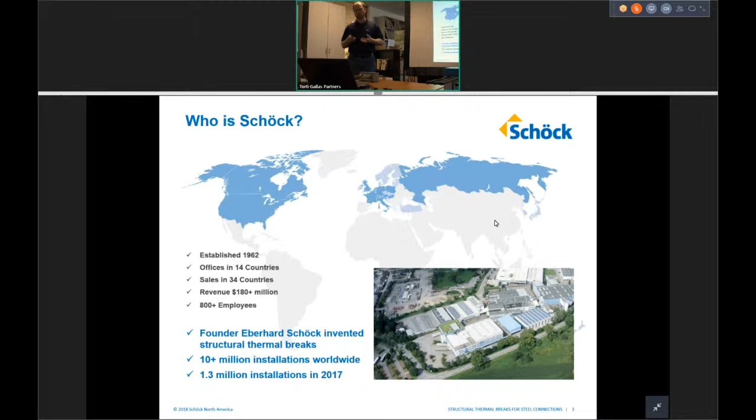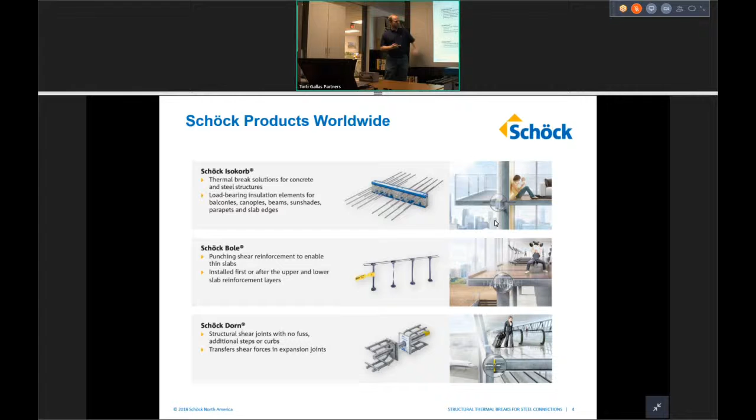Today we're known for being specialists in structural thermal breaks, which is what we want to talk about. Besides structural thermal breaks, we also make double-headed punching shear reinforcement for very thin flat plate slabs, especially shear dowel reinforcement where we have to transfer loads across expansion joints. We're just starting to roll out a thermal bridge-free facade connector for ventilated rainscreen facades, and we do a little bit of noise dampening solutions for stairways as well. So that's the other stuff we do, but the bulk of what we do, what we're known for, what everyone calls us up for, is the structural thermal breaks.

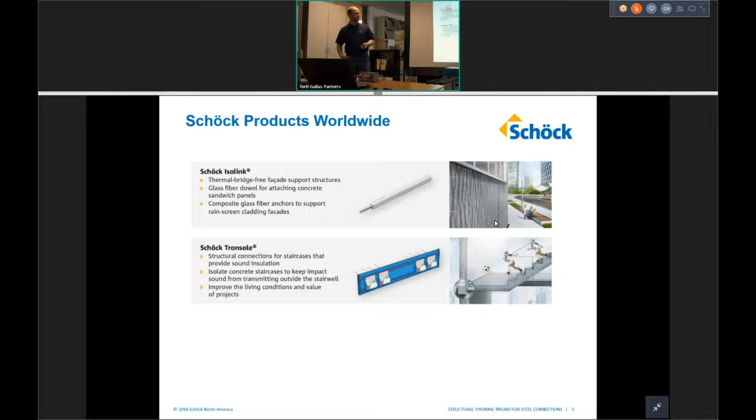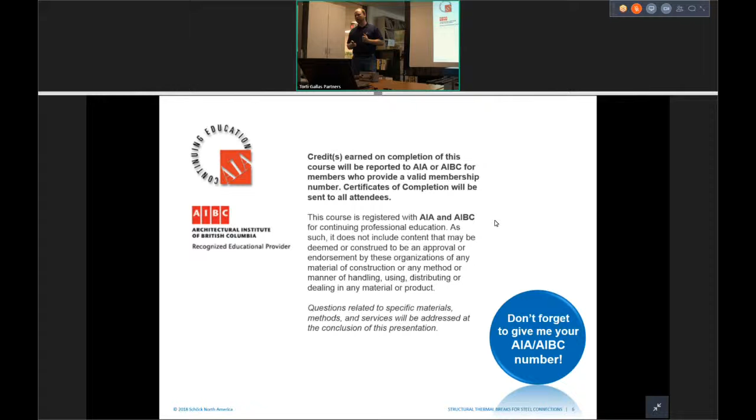Today's presentation, what we want to do is start out by looking at why thermal bridging and thermal breaks are more important than ever in steel structures, and how the building codes are changing and what that's going to mean for us into the future. Because of those changes in the building code, we want to look a little bit deeper into the building science of how to thermally model these thermal bridges and what difference the thermal break can make there. We need to talk a bit about condensation control, because if we're going to install a thermal break, that's often what it's used for, in addition to not wasting energy. Then at the end of the presentation, we'd like to go through a few of the solutions available on the market and look at some of the pluses and minuses and where their strengths are and maybe their sweet spots for those different solutions.

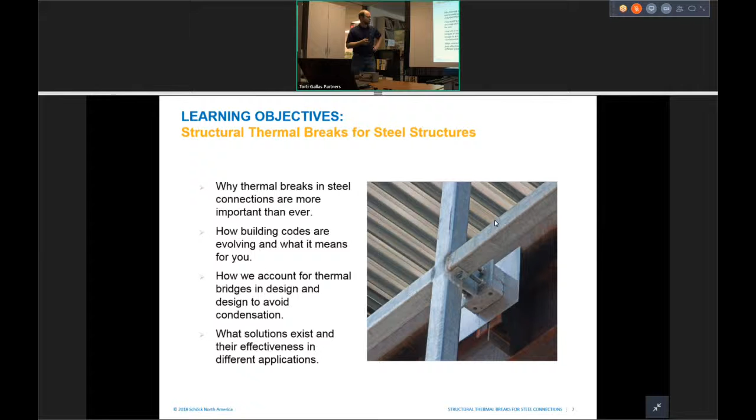Just to start out, a recap of maybe what we talked about 2 years ago. So what is a thermal bridge? We build a building, and in almost every case, we have to pass some sort of structural element through the building envelope. Whether that's a canopy beam at an entrance, maybe some rooftop dunnage posts, something like that. Somewhere on our building envelope, we're going to have structural elements coming across that insulation layer. And where those structural elements come through the insulation layer, because of the high thermal conductivity of that structural material, we're going to end up transferring a lot more heat at that location.

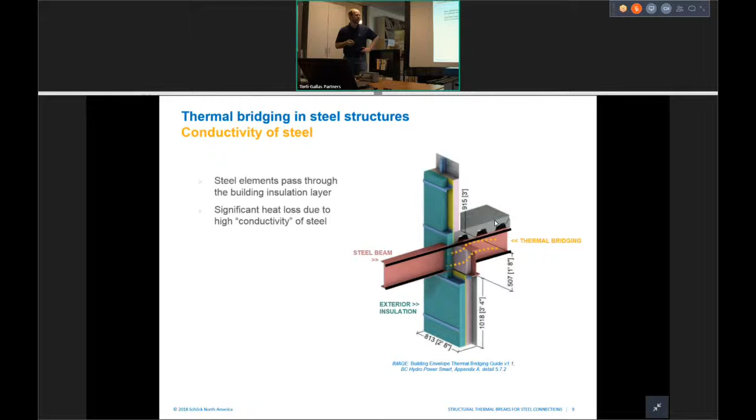So that increased heat flow is called a thermal bridge. If we compare the thermal conductivities of different materials back to mineral wool, since that's a nice standard insulation material, thermal conductivity for mineral wool is 0.03.

And so this is why, as architects and engineers, we need to start paying more attention to these types of connections, particularly as our energy codes are getting tighter and trying to tighten up things around energy use.

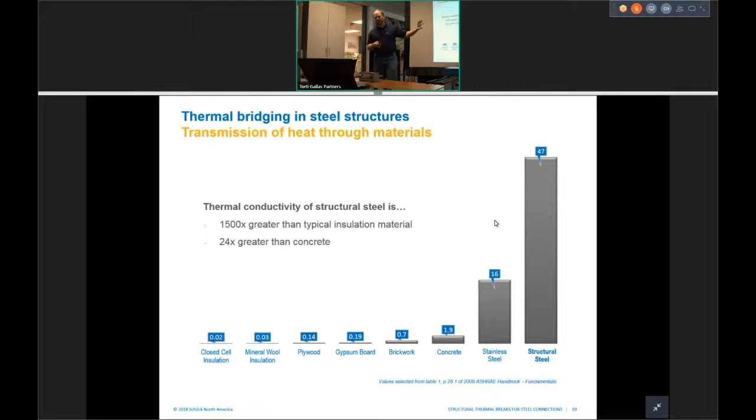Now, before we go forward, one thing I want to point out is that if we go from structural steel to stainless steel, it's quite a large drop, even though stainless steel is still pretty bad. There's a significant improvement once you make that switch in material. Remember that, because it's going to come up again at the end of the presentation when we talk about solutions.

So what are the big issues typically associated with thermal bridging? There's the obvious one of energy loss - we're wasting energy through the location where that structural element comes through the building envelope.

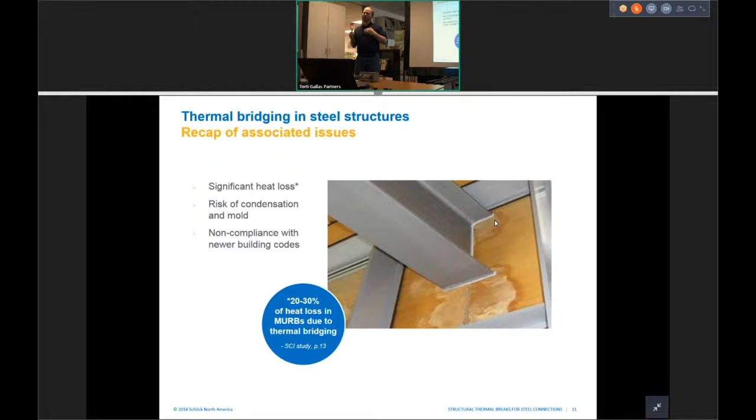Another issue is the risk of condensation or mold growth, particularly for steel connections - that's often a bigger issue than the energy loss. There can also be thermal comfort issues. And as energy codes are changing, if we're going to stay in compliance, we need to be paying attention to this issue.

But where do these types of problems occur in our buildings? There's the obvious one of a balcony - anywhere we have a balcony attached to our building. We're showing a steel balcony in this case, but it could be a concrete balcony or concrete slab.

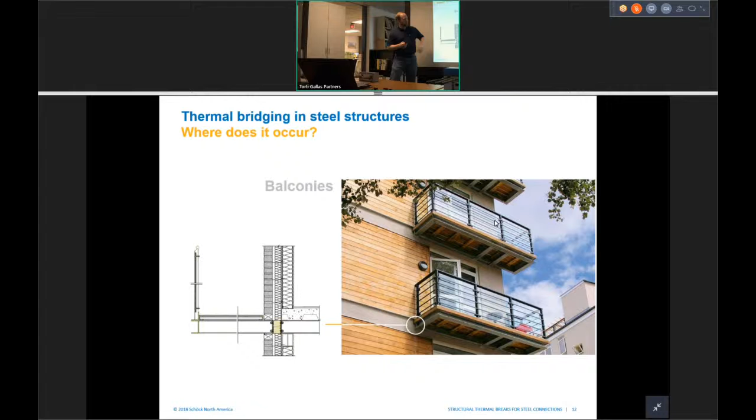Anywhere that steel beam comes through the building envelope and attaches - any sort of canopy, sunshade, or eyebrow connection on our building - all the connections for those elements are going to be thermal bridges if they're not treated.

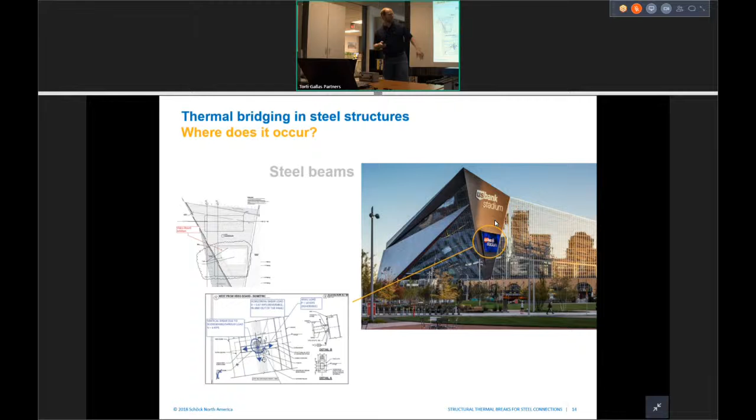Any sort of beam penetration through the building envelope. In this example, the beams pick up the load of the video board on the Viking Stadium.

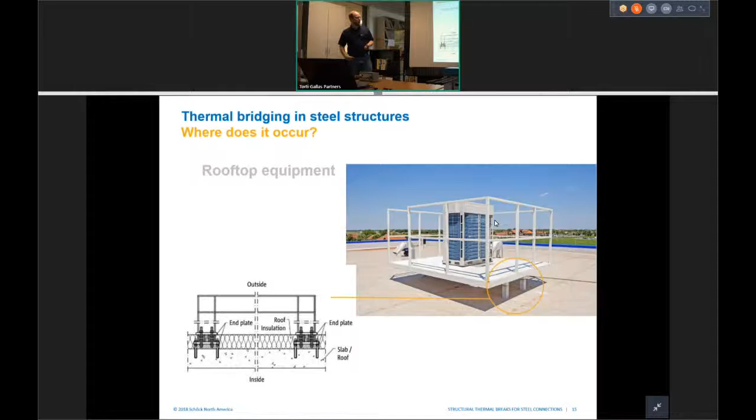Rooftop dunnage or rooftop equipment - those posts that come down through our roof insulation layer, a different variation on that theme. Screen walls are basically the same as rooftop dunnage posts, they just have much higher loads due to the wind load on the wall.

And then masonry support angles - these are often a big one because the toe of the angle usually crosses the continuous insulation. Because it's steel with high thermal conductivity, and there's a lot of linear footage of it all the way around the building, it can have a quite significant impact on the overall energy performance of the building.

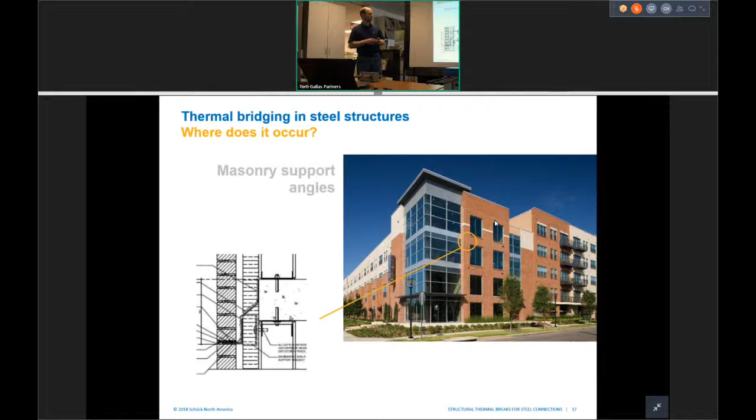Okay, so since 1980, our residential buildings or single-family homes have seen their energy use decline by something like 25% or more. Commercial buildings, it's about 50%. Most of those changes in energy use over time have largely been driven by changes in the energy code.

The energy code gets tighter, we respond to that, we design a tighter building in terms of energy use, and that just steps down over time. But what's interesting is during that same time period, our washing machines and refrigerators have declined in their energy use by as much as 70% or more.

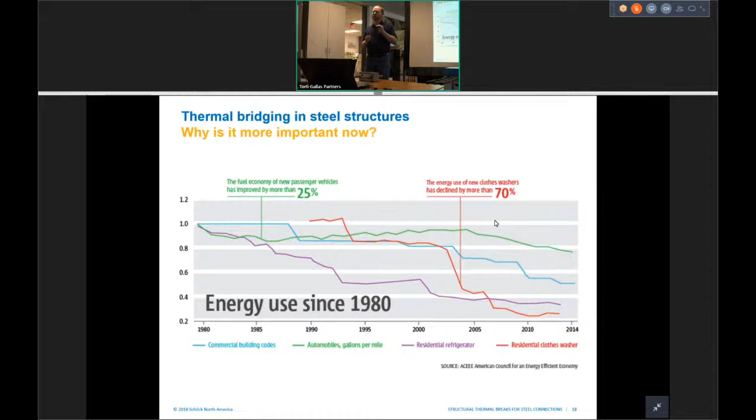So the question becomes, why can't we get the same level of performance in our buildings? If we pay attention to the right types of details, thermal bridges being one of those, then we can start to get that level of performance. Newer building standards, things like Passive House, are looking at that, trying to drive that number down to a very, very low energy use, or even down to net zero on our buildings.

But sometimes when we bring up this issue, we get asked the question: you're talking about energy performance, you're talking about condensation. I've never really had problems with these types of connections on my buildings before. Why is it a problem now? And that may be true.

But as the energy code gets tighter, and we're trying to design a more energy efficient building, one of the best ways to improve the energy performance of your building is to improve the air barrier and prevent that air loss through the building envelope. But as we improve that air barrier and tighten up the building, the relative humidity levels on the inside are going to rise.

Often that's a good thing, because in the middle of winter we usually end up with humidity levels that are actually outside that healthy range. That shows up as things like static electricity, or maybe nosebleeds. Those are associated with relative humidity levels that are too low.

But as we tighten up the air barrier and push that relative humidity level a little bit higher, connections where previously we didn't have these types of issues may start to have problems. So I really have to bring the whole building performance forward together, not just the energy side of it.

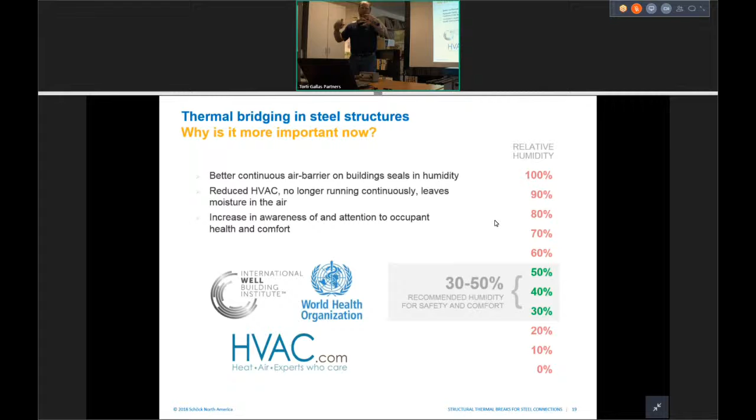Okay, but where are the building codes at with respect to this issue, and where are they headed? Right now, all of the more recent versions of ASHRAE 90.1 and IECC have a definition for continuous insulation that says the only thing that can cross that continuous insulation layer is a fastener.

Now, things like steel beams and concrete slabs are structural elements, they're not fasteners. So the energy code would really like us to look at this situation and deal with it in some way. Within the energy code, we've got several different paths to compliance.

We've got the prescriptive path, the building envelope performance method or trade-off method, and the whole building energy modeling method. With the prescriptive path, it's almost forced into using something like a thermal break to meet some of those prescriptive requirements in the energy code.

But many of the architects I've talked to don't use that method all that often. For the buildings we're designing today, we have to go to one of those other two methods to get them into compliance with the energy code.

With the building envelope performance method and the whole building energy modeling method, the energy code basically says you can sort of ignore the problem at its source, either add a little more insulation somewhere else on the building envelope, or maybe improve your mechanical system, and then say on balance your building is performing equal to or better than a benchmark building.

Now, it's great that the energy code gives us that much flexibility because we need that at times to design some of the buildings we're making today. But at the same time, it doesn't solve the problem at its source.

That problem still exists. We're still wasting lots of energy at those thermal bridges. We still may have the condensation issues associated with it, and thermal comfort issues if it's something like a balcony slab. And so that's sort of the downfall of that approach.

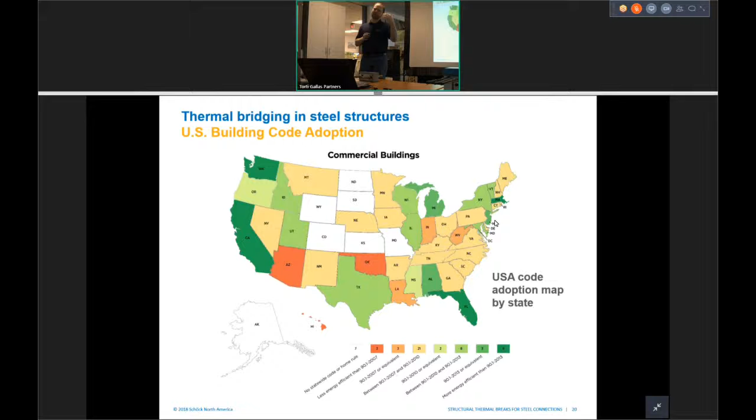They're still working their way through those comments, but my understanding is it's going to go out for one more cycle of review and comments, and they would like for it to get into the next version of that energy specification. It begins to tighten up the language quite a bit surrounding thermal bridging.

One of the things it's doing is starting to get into a little bit of thermal modeling that's a bit different than what we're used to seeing. Right now, we're used to just doing COMcheck, REScheck, things like that to get to compliance.

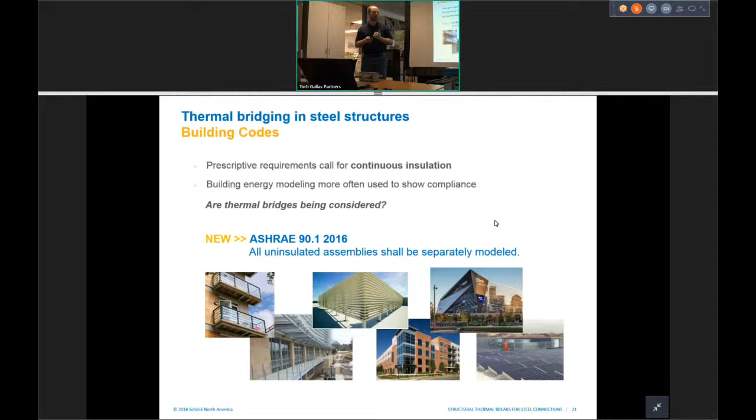But there's going to be a deeper level of calculation or other parameters we have to look at as we begin coming into compliance with the new language in the energy code. So what I want to do now is talk about that building science and what that might look like going into the future.

So we're going to thermally model this type of detail. First, we want to define three terms so we understand what we're talking about. The first term is clear field transmittance, which is basically the overall U value for the building envelope when there's no penetration. The second parameter is linear transmittance.

A linear transmittance is something like a balcony slab, a long linear element, or maybe a masonry support angle, and that linear thermal bridge is measured with the Greek letter psi. A point transmittance, something like a canopy beam, is measured with the Greek letter chi.

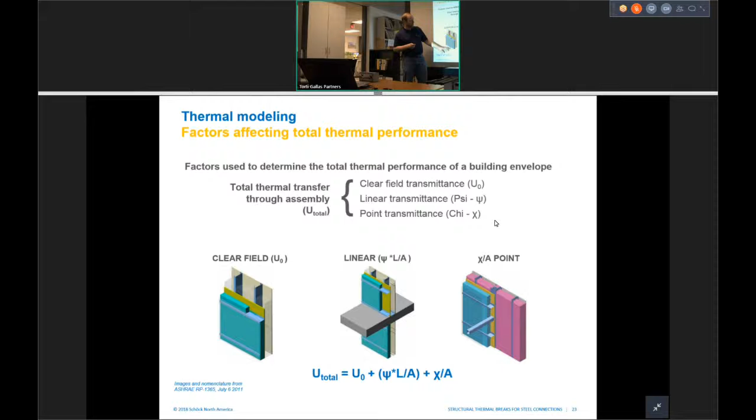If we want to capture their effect on the overall performance of the building envelope, we need to add their effect into the clear field transmittance to get the overall performance of the building envelope at that detail.

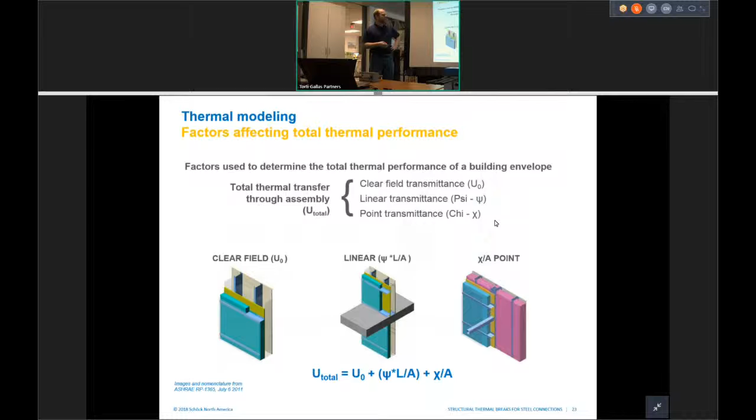If you really want to calculate those Greek letter parameters, you have to create two thermal models: one of the clear field condition with no thermal bridge, and one that has the thermal bridge in it. The difference between those two models gives you that parameter. But I don't know many of us who want to do that on a regular basis, particularly early in design when we're trying to make big decisions and things are changing quite a bit.

ASHRAE realizes that as well, and they're trying to work that into the language as they go. But one of the things they've done to help us is develop a research report that's basically a catalog of details—a lot of these things are pre-calculated.

That research report was later expanded by the same company into the BC Hydro Building Envelope Thermal Bridging Guide. That guide is constantly being updated, and the catalog keeps getting bigger. It's a good reference, particularly early on when you're looking at big decisions, to say, my detail looks something like this, I'm going to use that number for now before we refine the design.

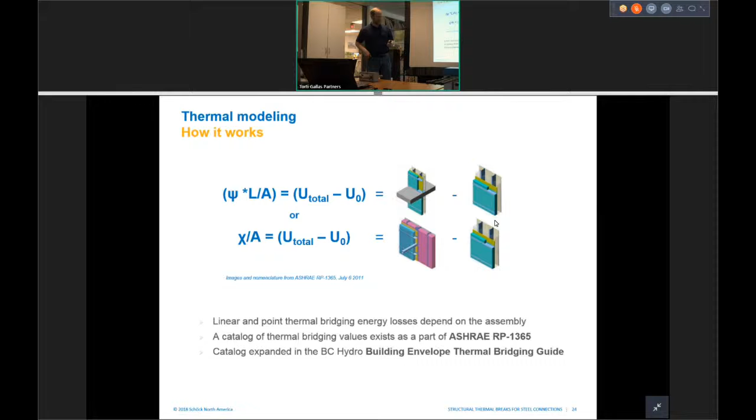But let's go through that thermal modeling process and see how it works step by step. This is a detail from that thermal bridging guide—it's a steel building, a fan deck with concrete slab, steel stud walls, batt insulation between the studs, and some continuous insulation on the outside of that wall.

And then we have a beam penetration through the building envelope. If we first ignore the beam penetration and just calculate the overall clear field transmittance, the clear field transmittance for that wall ends up with a U value of about 0.054, which corresponds to an R value of about 18 to 19—a reasonable wall.

But if we include the effect of the linear transmittance and the point transmittance from the beam into the overall performance of that detail, we get the U total value. What we find is that U value increases by about 3 times, meaning our R value drops from about 18-19 down to about 7—quite a large impact at that slice of the building envelope where that detail occurs.

If we look at where most of that's coming from, it's that steel beam. Now, just to note, they also say there's a linear transmittance here—it's very small. They say there's a linear transmittance at the slab, even though that slab doesn't come all the way through the building envelope, because the batt insulation between the studs stops just where that slab is.

It doesn't pass by that slab—it stops right there. So you can see in the thermal model they get a slight amount of increased heat flow there, but not enough to make a huge difference. So it's basically all just coming from the steel beam.

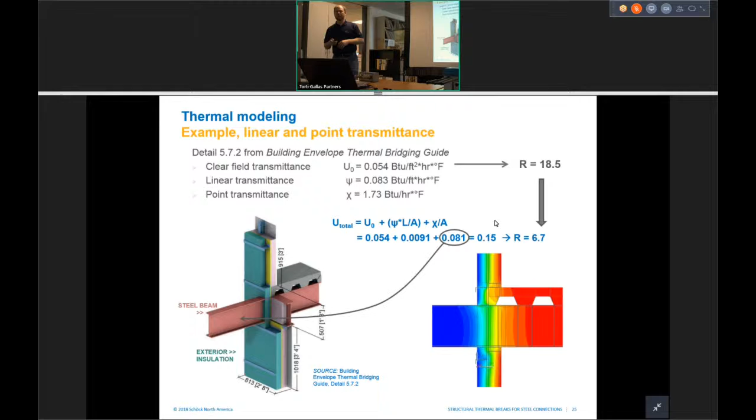But that's how that process would work if you were to go through that step by step in very minute detail. Language in the specs gives you options to make it much simpler and just tabulate it, or if you really want to go to that level of detail, you can go ahead with that.

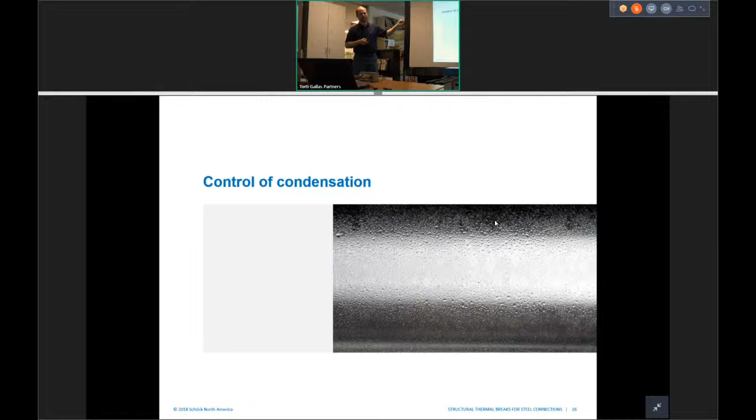But if we're going to talk about solutions to solving these problems, then the other thing we need to talk about is condensation and condensation control. This is not something ASHRAE gets into so much because they are an energy specification. We've talked to them about it, and our scope is basically looking at the overall energy performance of the building, not the rest of this stuff, but it's still an issue. So what we want to do now is talk a bit about the science of both measuring that condensation risk and what we might do to mitigate that risk.

So if we want to look at the science behind it, we're going to use that same detail we looked at before to study this. But what we want to do first is define what's called a temperature index. A temperature index is basically just a ratio between our interior surface temperature of our building relative to the inside and outside air temperature. Now, this ratio can vary anywhere from 0 to 1.

If it's at 0, that means you don't have a building envelope - your interior structure is as cold as the outside air. If it's at 1, that means you have the perfect connection at the building envelope - you're not getting any more heat flow than you would through your insulation layer. That's never going to happen when we have structural penetration; you're always going to get some sort of increased heat flow. But the idea is to minimize that and get this temperature index up to as high of a level as we can, to have little to no risk of condensation.

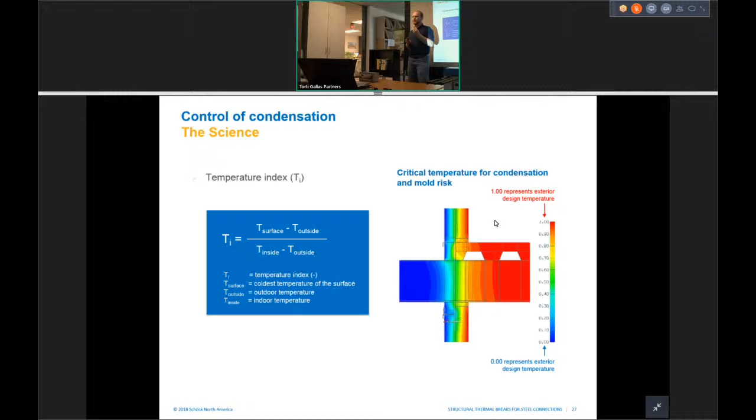So that's the way we can measure our detail. But now we need to compare that against something to understand what type of risk we're going to have of condensation. To do that, to determine what's called a critical temperature index - basically that temperature index where we're going to have condensation - you've got to go to ASHRAE psychrometric charts, or as I like to call them, psychometric charts, because they look so crazy.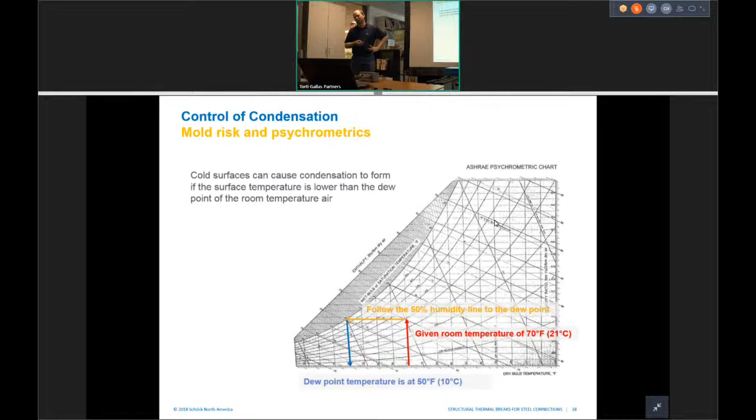This chart is basically just a relationship between interior air temperature, relative humidity, and dew point temperature. If we want to use it, which I don't think most of us want to, you start on the x-axis with your interior air temperature, go up to what you think the relative humidity is, follow that across to the saturation point, and then back down, and that gives you the dew point temperature. You can use that information to calculate a critical temperature index, or a temperature index at which condensation will form. But most of us, if you're like me, don't want to use that on a regular basis.

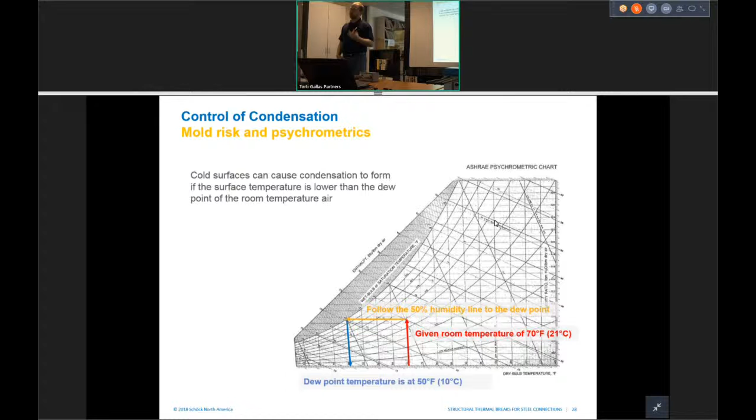So one way to simplify it down is just ask your mechanical engineer, or do the exercise yourself one time. Say, look, I know roughly what my temperature ranges are going to be and my relative humidities. I'm going to create a simple table that tells me all of that information, and I just have that tabulated somewhere. So that's one way to simplify it.

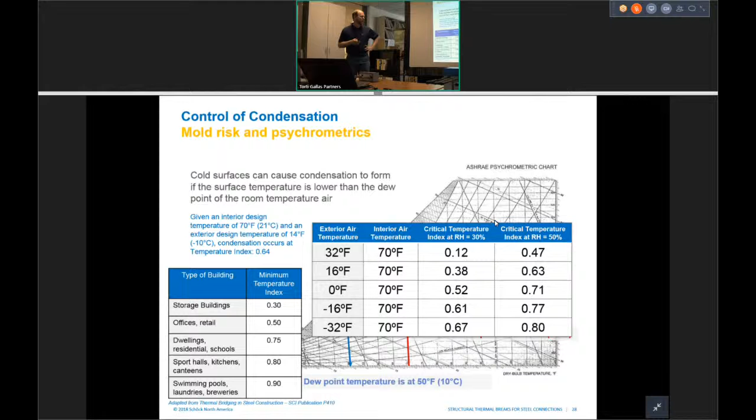Another way you could simplify it - this is what our building codes don't address so much, but in Europe they get a little more into this. In the UK, they say, well, we're going to get rid of all of this, not make you calculate that. We're just going to do it based on building type, because we know roughly what our relative humidity should be, and because they're a fairly small climate zone, they can do this type of thing. But we're going to use this as sort of a proxy, because it's good rule of thumb numbers to keep in our head where we need to be.

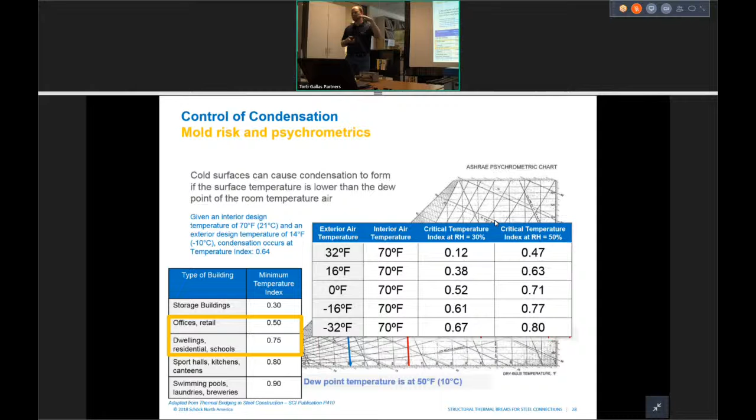So what they do in their specifications is say for office buildings, keep your temperature index above 0.5 if you don't want to have a risk of condensation. For residential buildings, keep it above 0.75. For residential buildings, the relative humidity level is usually higher, so that's why we want to keep that temperature index higher.

Okay, now if we go back and look at the same detail we've been looking at and say, well, how is it impacted?

Both if we don't do anything, and then if we try some solutions to try to fix it. So if we don't do anything, our conventional case, uninterrupted steel beam, it goes right through our building envelope. For this particular detail, that will have a temperature index of about 0.52. So it's marginal for an office building. You might have a risk of condensation, you might not. You're kind of at that boundary where you might have a problem, you might not.

One of the solutions to try to fix this, and we're going to talk about it more, is to use the thermal pad, which is an okay solution if you do it the right way. But often what we've seen in drawings that have come across our desks with these types of solutions is that they're specified at very thin pad thicknesses. But what happens is if you use a very thin pad, you actually get negative performance here. Your temperature index drops. It's not until you get out to about 1 inch thick with stainless steel bolts that we basically get back to the same level of performance that we had previously with just that continuous steel beam. If you want a nice improvement, you need to be 1.5 to 3 inches thick. And we're going to talk about that a bit more, why that's the case, why you get this negative performance, and why you need to have a thick insulation layer.

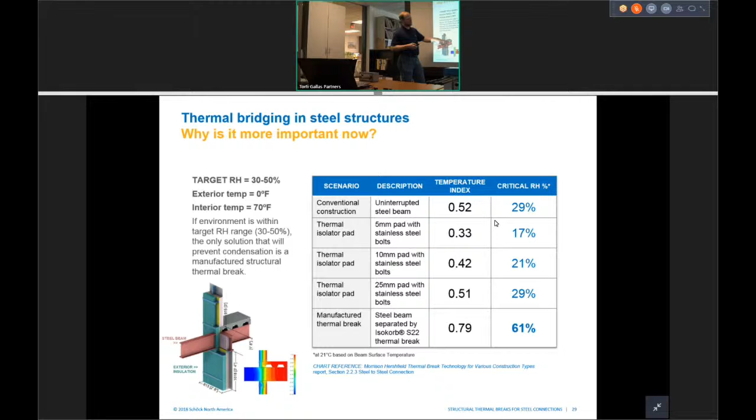The Schöck solution, the one we'll pass around in a minute, it's kind of a manufacturer modular solution, tries to wrap all this, what we've learned, up into one solution. And we can get temperature indexes up to about 0.79, which is basically in the gymnasium range without having condensation issues.

So we've talked about kind of where the building codes are headed, the thermal modeling side, and some of the condensation issues. What we want to do now is look at solutions that are available on the market, some of their strengths and weaknesses, and kind of where the sweet spots for them might lie.

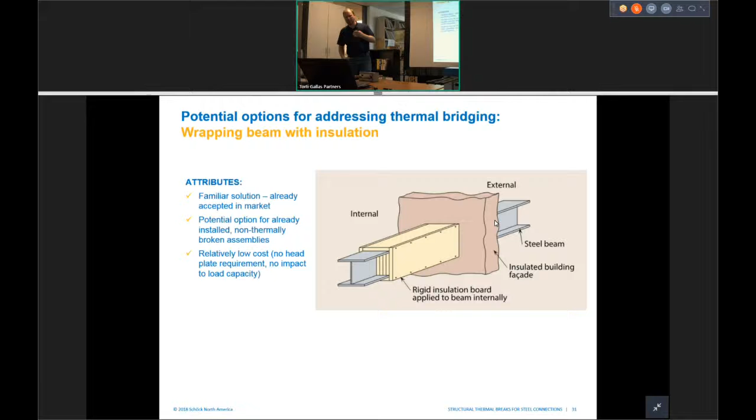And so the first solution we want to look at is probably the oldest one in the book. And that's just to wrap the beam in insulation for a few feet, either inside, outside of the building, or both. Advantages of this type of solution: it's fairly cheap, easy to install, pretty straightforward, but not really any additional materials that we haven't used before. But the challenge is, first of all, it's not a true thermal break. We're still going to get a lot of energy transfer across that connection.

When you use this type of solution, what you're really trying to do is you're trying to solve a condensation problem. And to give you an example of how that works, this detail, if you didn't put any insulation on it, its temperature index is going to be about 0.51. You wrap it for a few feet in insulation, you can move that temperature index from 0.51 to about 0.55. So it's a marginal improvement.

But if you've got an existing building where you know you have a problem, you know you've got condensation issues, and you've done your calculations, and you say, well, I'm just right at that boundary, the relative humidity level is a little bit too high, that's what's causing my condensation issues. If I move that temperature index just enough, I'm not going to have that problem anymore. Then wrapping that beam in insulation might be a great way to solve that problem. It's already in the field, you know you've got a problem. And so that's sort of the sweet spot for this type of solution—existing buildings where we know we have issues, and we know we're at that boundary, we just need to move just a little bit.

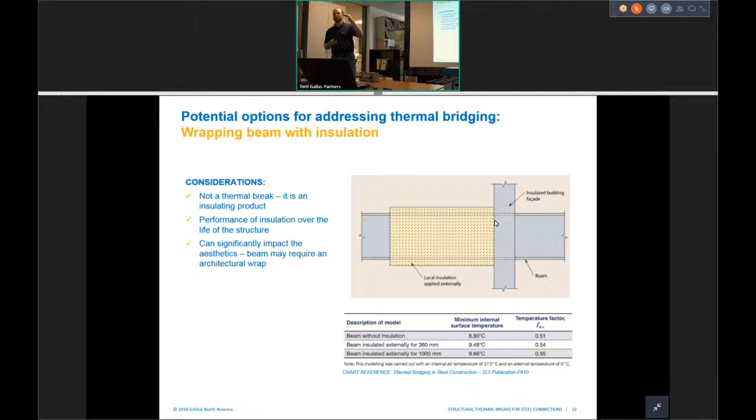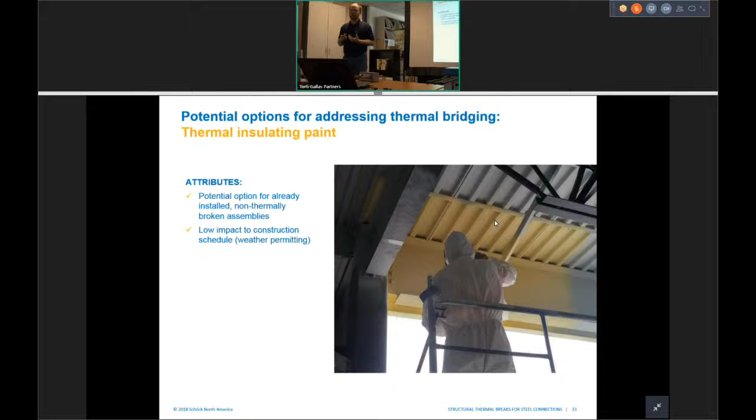The modern twist on that same idea is what's called a thermal paint. Now, thermal paint is basically, if you look at the manufacturers who make these things, an insulation material that's wrapped into a binding liquid and then spray applied to the beam, usually at fairly thick layers. In principle, it's the same as wrapping the beam in insulation. It just happens to be a different material, so they try to reduce that thickness. It has a lot of the same advantages of wrapping the beam that we talked about before, but also the same issues that go with it.

In terms of, it's not a true thermal break, you still get quite a bit of energy loss across that connection. And its sweet spot, once again, is probably for existing buildings where we know we have problems, and we're trying to push it just enough that we no longer have those condensation issues.

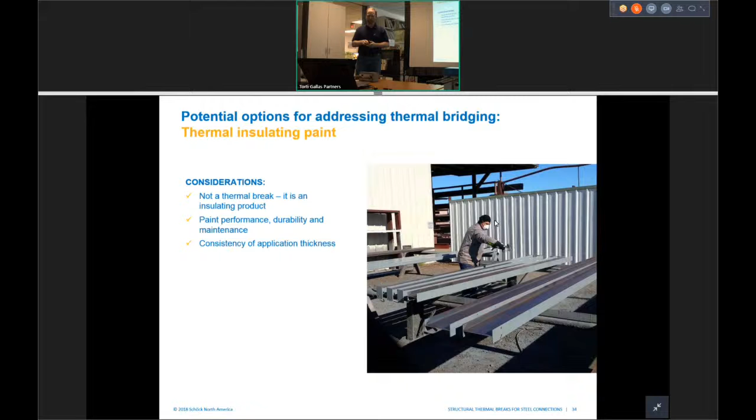Now, something that is more of a true thermal break are the thermal pad solutions. With a thermal pad solution, where that beam penetration would come through the building envelope, the steel fabricator will cut that beam in their shop. They're going to weld end plates in place on either side of the beam. You're going to insert a thermal pad material between those, bolt it all together, and sandwich it together.

Now, that thermal pad material can vary from manufacturer to manufacturer, but practically it's basically a piece of fiberglass, some sort of resin-based material. The advantage of this solution is that because it's a piece of fiberglass that just gets inserted between the end plates, we get a lot of flexibility with that end plate design in terms of bolt placement and things like that.

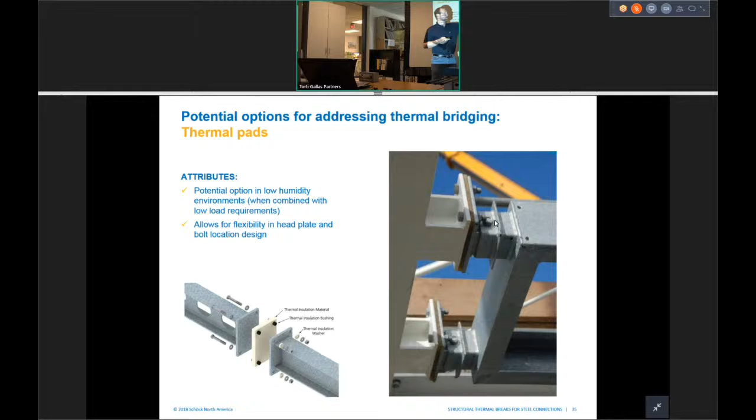Some of the drawbacks we'll get to in a minute, but first I want to talk about why we said before that we have negative performance if the pad is too thin. We'll see that on the energy side in just a second. We showed you on the condensation side, but the reason you get that negative performance with a very thin pad is that we usually start out with a beam that looks something like this.

So it's a wide flange beam. It's been optimized for a long time by the structural engineering community and the steel community to make that beam very efficient and cost effective. But once we cut that beam and weld that end plate onto the end of it, we go from a steel area of something like this to a steel area of something like that. So it's an order of magnitude increase in steel area.

And because of that very high thermal conductivity of structural steel that we talked about in the very beginning, if you don't get a thick enough insulation layer between those two end plates, you're going to get negative performance out of that connection. You would have been better off just leaving it alone if you're not going to use a very thick insulation layer. You really need to be 1.5 to 3 inches thick to get the type of performance you probably are expecting out of the connection.

On the energy side, once again kind of the same chart we showed before, relative to basically doing nothing, you get negative performance up to about 3/4 of an inch to an inch thick, and then you get a nice benefit in terms of energy performance and condensation performance. 1.5 to 3 inches thick is where you want to be. And then somebody's got to address the structural bolt issue where you have bolts crossing that thick of an insulation layer. But that's sort of the key with those types of solutions.

The drawback to a pad solution, or the thing to keep in mind, is that it's probably more of a new design type of solution. No one wants to go out and cut the beam off their building after it's already in place, weld end plates onto it, and bolt it back onto the building. It's more of a new design up front. We know we got an issue, and we're going to try to take care of it.

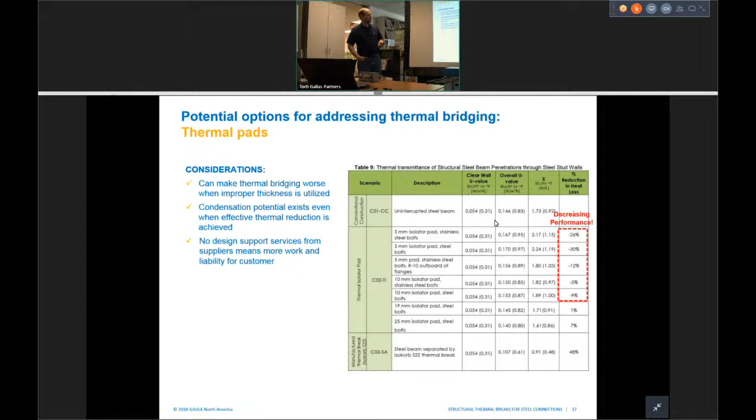Now, the solution that Schöck offers tries to wrap all of what we learned into one solution, an engineered, manufactured, modular solution. So what we do is we know we need to have that thick insulation layer, so we start out with a 3 1/8 inch thick insulation layer. And then the bolts that we pass through there, we make them stainless steel for the reasons we talked about at the very beginning with that chart, that structural steel to stainless steel. You get a much improved thermal performance when you switch to stainless steel. Even though it's not great, it's still much improved.

We'll insert these modules at the top and the bottom of the beam to carry the tension, compression, and shear that we have to transfer across that connection. But since we do have such a thick insulation layer, to prevent these bolts from going into bending and carrying all that load, if we were to strip away all of the insulation from around this module and just look at the structural pieces on the inside—because we're not relying on the insulation to carry any load—what you're going to see is something that looks like down here on the lower right. So you've got the two stainless steel threaded rods that come through and act as the bolts.

On each face of the module, there's a stainless steel plate, and in between those plates, there's a stainless steel tube welded between them. So the load path, instead of bending those bolts across the connection, goes through that tube and out the other side. That's how we deal with the thermal side, the condensation side, and the fact that we've got to carry structural loads across that connection. It's manufactured as a modular solution.

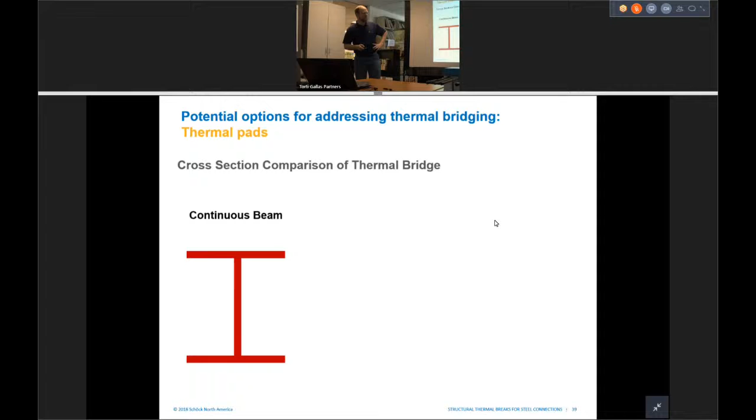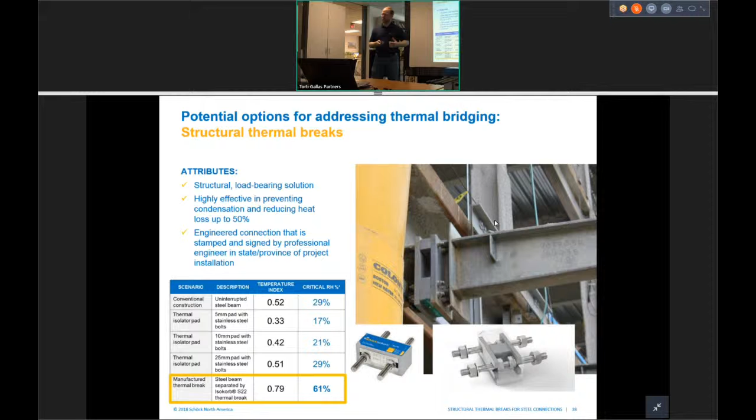Some people look at this steel going through the module and say that still looks like quite a bit of steel. How's that any different than what we just talked about with the wide flange beams, the end plate, etc.? So if we go back and look at that same situation as before: continuous beam, cut it, put the thermal breaks between it.

If we were to take a saw right down through the thermal break modules sandwiched between those end plates, what you'd see crossing that insulation layer is this: we only have the area of the bolt, or threaded rod, and the area of the tube. So we've reduced the steel to just what we need to carry the loads across the connection. We're using an improved material, stainless steel rather than structural steel. Also, because of how they're distributed across the connection, it helps with that temperature profile and temperature index. That's how you're able to get that very high performance out of the connection.

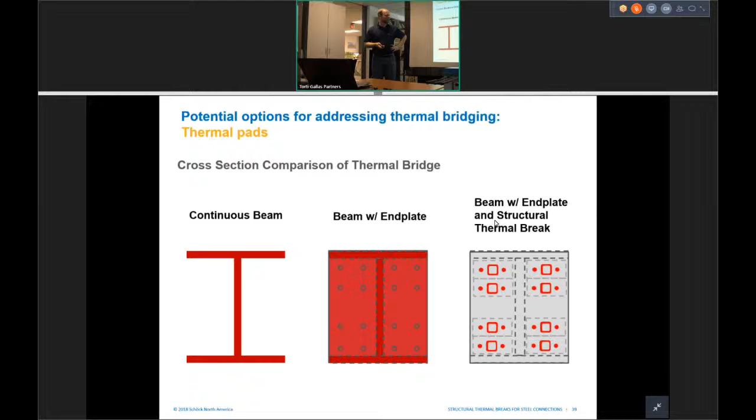But just like with the thermal pads, this is not a likely solution for retrofits, for the same reason — you don't want to cut that beam off that's already in the field. It's more of a new design type of solution. Because it's modular, those bolts come at a standard spacing for each module, and the design of that head plate needs to be worked out during the design process. So that's kind of how that works.

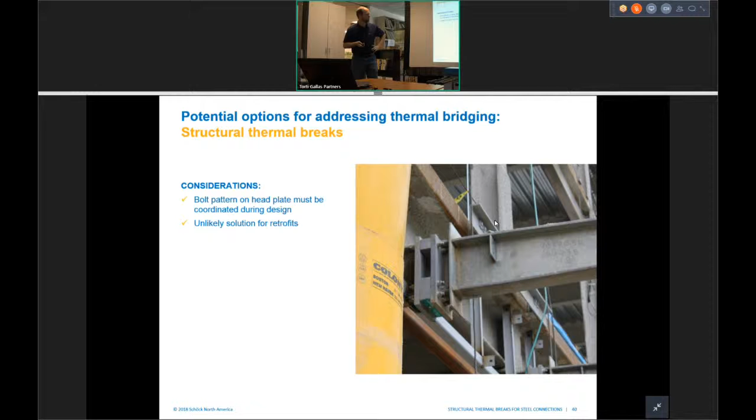So where has it been used? We've been talking about steel connections in this presentation. I don't know about other manufacturers, but at Schöck, here in North America, the latest project count is north of 320 projects either completed or under construction right now. About half of those are concrete, the other half steel-to-steel connections. Quite a few of those projects are up in the New York City area — it's been our biggest market so far in terms of adoption and uptake of these types of solutions.

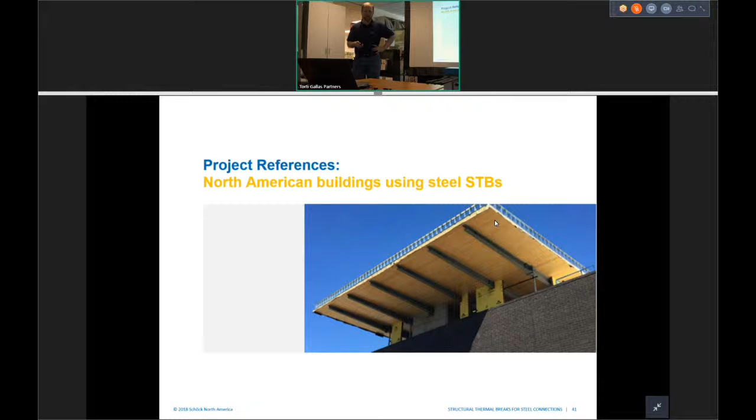What I want to do is show you a few examples scattered around North America, but also the rest of the world, to give you a sense of what can be done with a thermal break. This first building is up in Massachusetts, at the Life Science Laboratory at UMass Amherst.

We were asked to thermally break all these canopy beams on this side of the building, as well as the ones on the other side that you can't see — I showed an image of it a few slides back. This is what it looks like when they came back and finally finished the thermal break. Between the modules, top and bottom, you just insert rigid insulation, and that finishes the thermal break. Then they finish the rest of the building envelope, wrap that up, and you don't even know it's there.

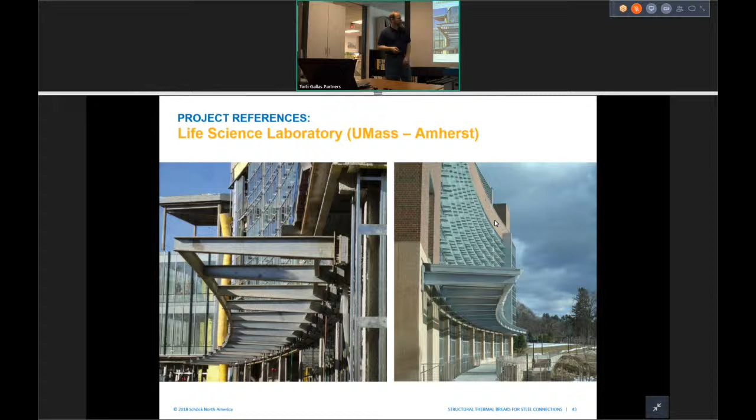The loads are pretty high on this connection, so we needed multiple modules. That's one advantage of it being modular — as the loads increase, you just increase the number of modules in proportion to that. So that's before the beam's in place, and then afterward there on the right.

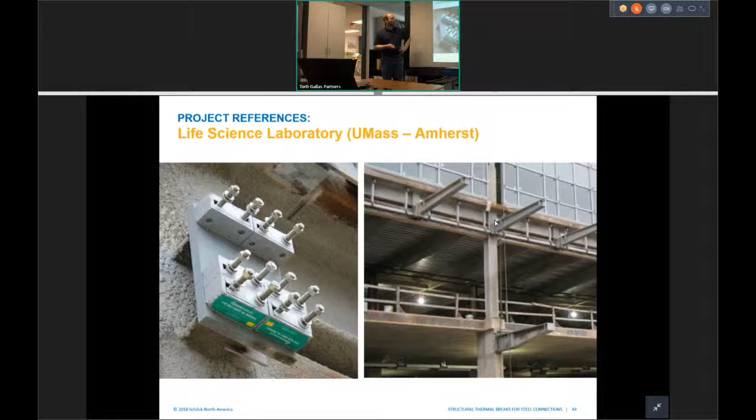Next project is the Minnesota Vikings Stadium. We were asked to thermally break all the beam connections for this giant video board on the outside of the stadium. There are quite a few beam penetrations that come through — it's probably hard to see in the back a little bit, but they're circled here in red, probably about 30 of them. They're just this beam stub with those same modules, one top, one bottom, to pick up those loads from the video board.

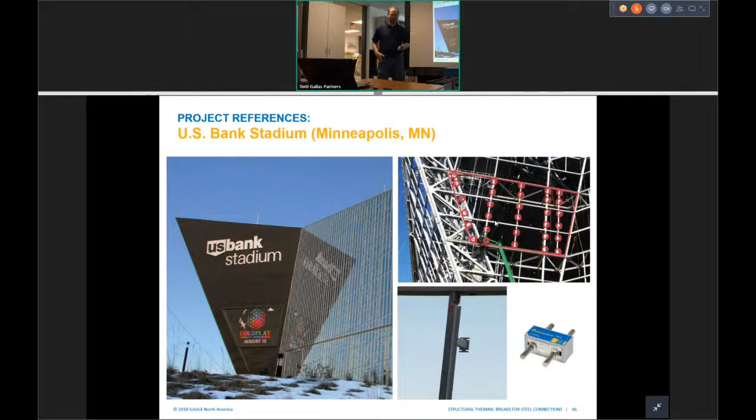More of a local project, the National Museum of African American History and Culture down on the mall. We did not have a huge part on this project. Ours was actually fairly small.

We were asked to come in and thermally break some rooftop connections where the air handling units came through the roof. So what we did is we took that same module, turned it vertical, and used it more of a rooftop dunnage application, with quite a high compressive capacity.

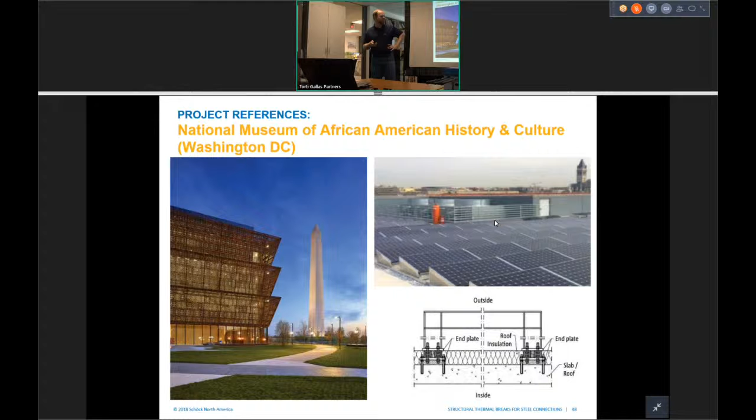Another interesting project. I'm not sure yet if we're on all 7 continents, Australia being the one I'm not sure if we ship material to yet. We've got the hard one out of the way, and that's Antarctica.

This is Brazil's research station down on King George Island, the one that had previously burned. They had a design competition for the new one, and the winning design was this, where they would build this superstructure as modules off-site and then bring in and basically bolt onto the foundation below.

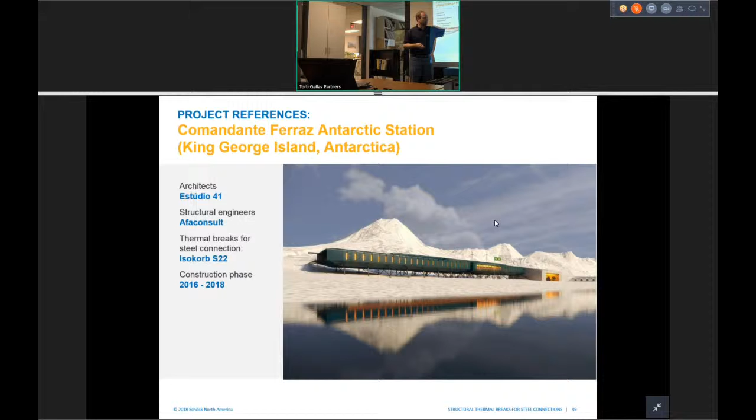We were asked to thermally break all the connections between this bracing structure underneath and the living module. This is what it looks like as they were constructing it off-site, going through the first build, making sure it all fit together.

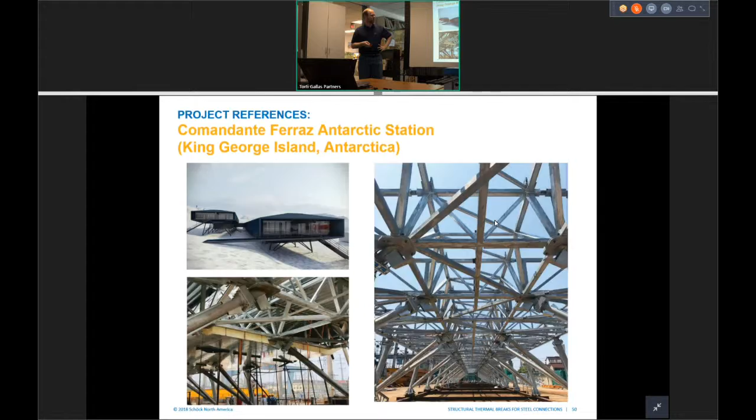I don't have updated photos. It's my understanding that it should be in place now in Antarctica, but unfortunately I don't have the updated photos for that. Okay, it gives you just a little bit of a sense of what can be done on the steel side with those thermal break connections.

Okay, so just to summarize here, what did we talk about? We went through how thermal bridges happen, where they happen on our buildings, where the codes are headed, what that means in terms of thermal modeling, and how these new Greek letters impact our overall U value in terms of linear and point thermal bridges.

We talked about condensation control and this idea of a temperature index to measure that and have a reference point. And then we wanted to look at some of the solutions that exist and their effectiveness.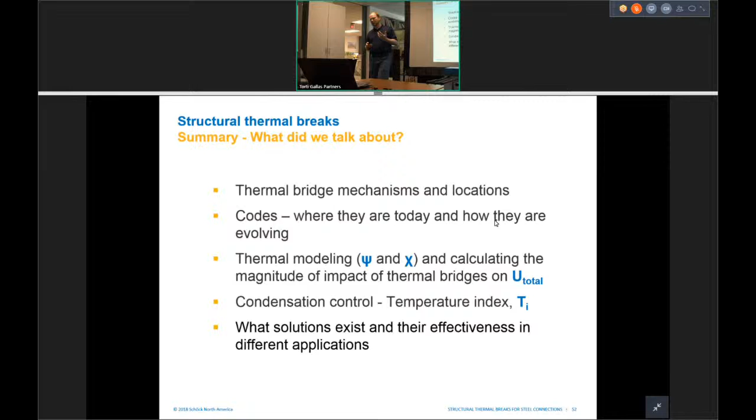Now, what I hope we take away from this today is first of all, the realization that these linear and point thermal bridges can have a significant impact on our U value at that slice of the building envelope where they occur. They can increase the U value by multiple times, or drop that R value quite a lot.

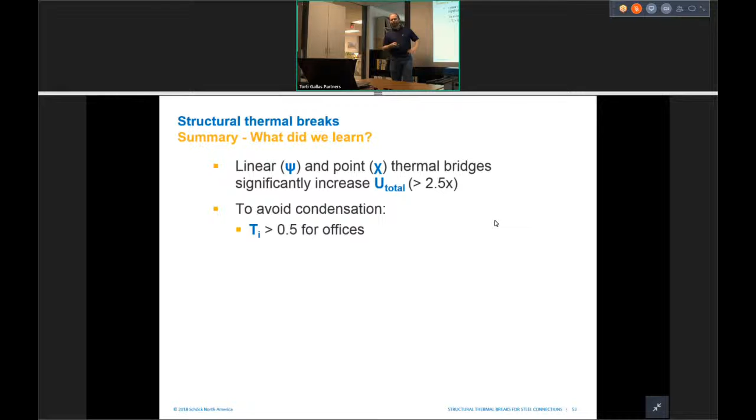We want to avoid condensation. Good numbers to keep in our head in terms of rule of thumb: keep that temperature index above 0.5 for offices, 0.75 for residential.

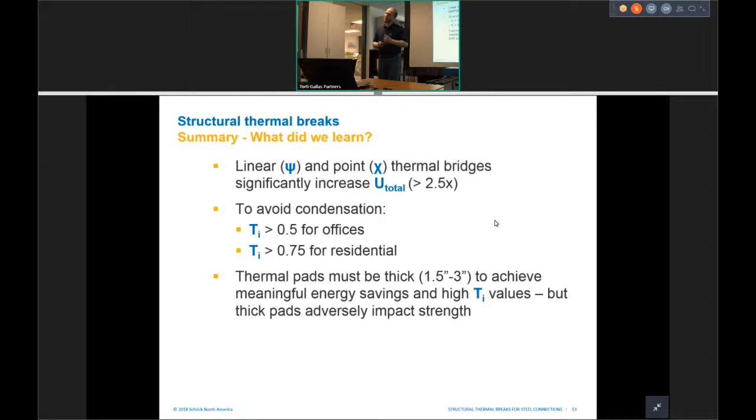If you want to use a thermal pad solution, that's fine. Just make sure it's thick so you get what you think you're getting, 1.5 to 3 inches thick. And then somebody's got to design the structural bolts across that insulation layer.

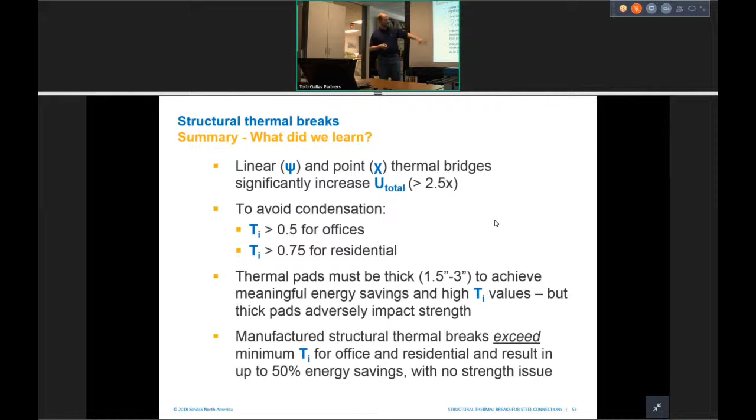So you want a solution that's manufactured to try to wrap all that up into one, as well as doing a delegated design for that connection. That's what Schöck offers.